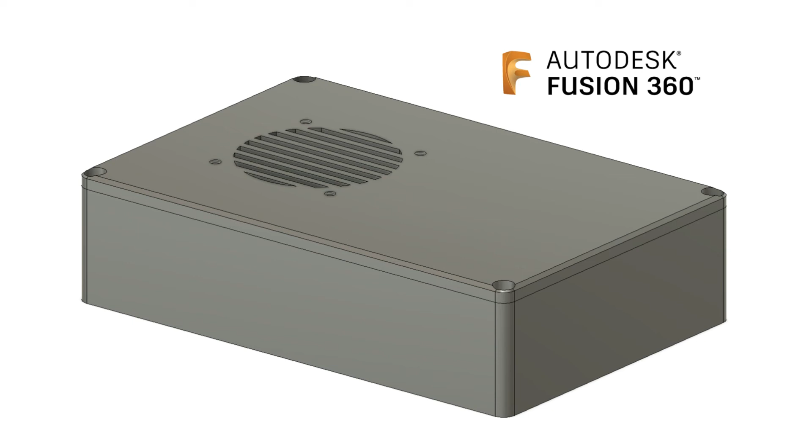Alright, let's get started with the design. So we're going to start with a new component, and before you start any design, just save the actual file, so that you have it. So we will name this to the base,

and we will take the top, and then we want a rectangle. Let's go, say, 80 millimeters long by 35 millimeters wide. That seems like a good number to start with. I can double check that number with an existing Raspberry Pi real quick here, just to get an idea. So we're going to want to go a little wider.

Just measured it. We're looking at, let's say, 70 wide by, well, the Pi itself is basically 90 millimeters, but to get usable length, we're going to say, let's go 110 millimeters on the length. So 110. And then that's going to be the outside, the inside diameter.

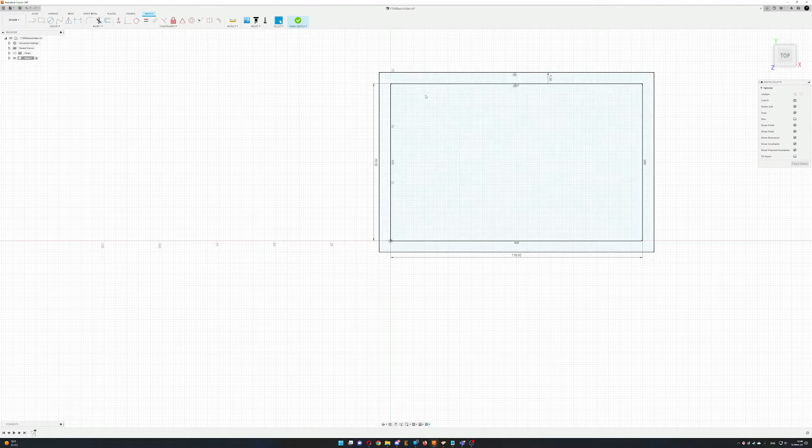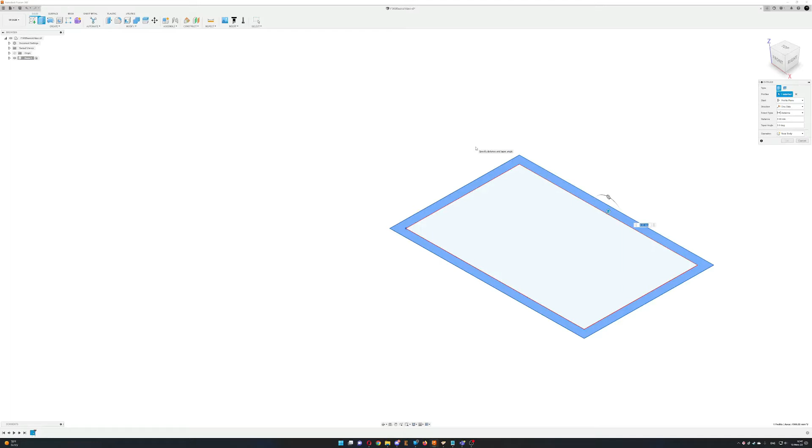So now we're going to hit E for extrude. We're going to select the outside wall, and for this case it needs to be, let's say, 25-ish millimeters. Let's say 30 millimeters tall. Just so we have some air clearance and some room for pins.

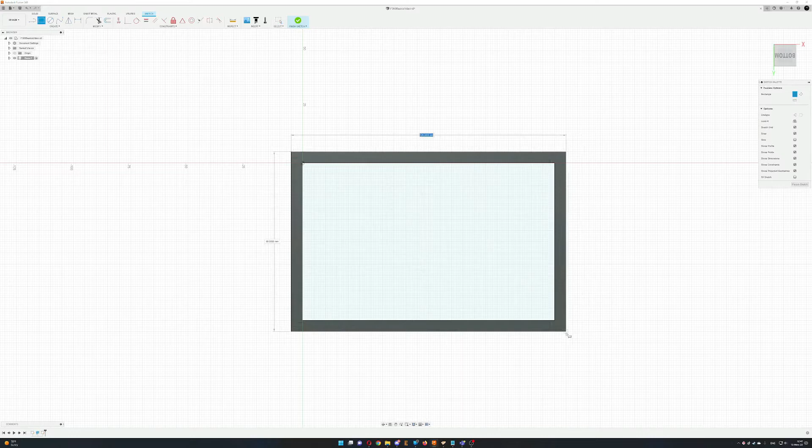Alright, so now that we have the walls done, we're going to go underneath, and we're going to click on Create Sketch. We're going to click on the bottom, move it to the center, just click a corner here, click that, click Finish, and Extrude. Select both of those, and we're going to go down, let's say, 2 millimeters. And since those join, now we have a nice beautiful box here.

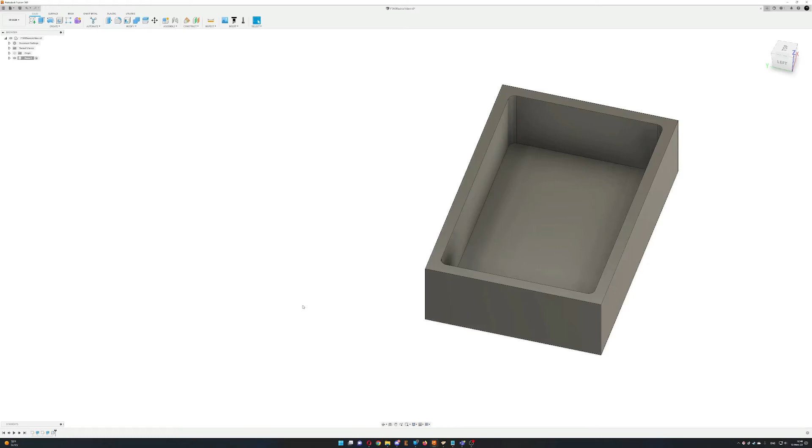But since we know that this is going to get machined, we need to put some fillets in here so that it's planned for. So what a fillet is, it takes the two corners and it rounds them. And we're going to use a 6 millimeter end mill, so we'll make these 3 millimeter. That way it's nice and clean. And we will also do that to the outside, just for aesthetics at this point, really. And then click that and that, and 3 millimeters there, just so we have a nice aesthetic looking box.

Alright, so the next step is orientating it, deciding which way you want it. So we need to add holes. Well, actually, it depends. We can build the studs into this design, like I've done for Young's project for the motor scooter, or I can build with just holes for standoffs. And I think for our case here, I'm just gonna do standoff holes.

So what we do is we make a new sketch, click the inside there, and then we're going to go find a point, and click 4 points, because there's 4 holes. And then we need to start doing some referencing. Whoops, not D, not R. So we're gonna go off of that wall. Based on the measurements of my Pi here, I know I need at least 4 millimeters on this wall. So we will go 4.5 millimeters for a little bit of clearance.

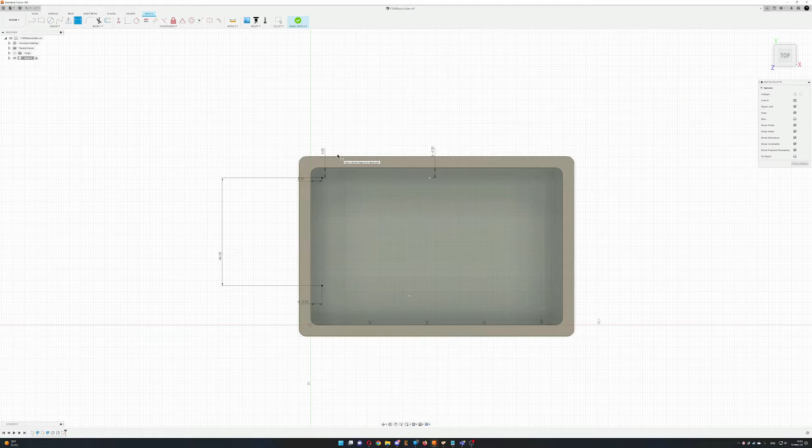And that's a good way to do it if you have a lot of the same dimensioned part. There's also other methods you can use where you can set up dimensioning that's a little more advanced, where you just type in a name and it knows the dimensioning based on that. Alright, and then for this part here, that's also going to be referenced off of that one. Also, if I need to adjust the referencing any, I have a quick way of doing so if I need to change it.

And since we need to measure that screw length, which is, let's see here, that appears to be 58 millimeters. So we just take this, go to there, make sure you don't have any weird angles going on. 58. And then this one will reference this, but again, make sure it's not perpendicular to this. You got to make sure it's vertical. And that's also 49. And this distance is the same as this distance, since it's a rectangle. And now we have our 4 holes.

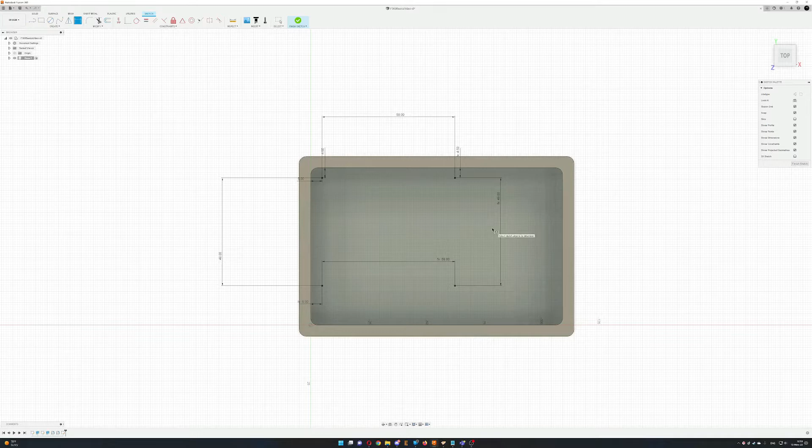Now you click Finish Sketch. Think a minute. Right now, Fusion is under maintenance. I'm doing it in offline mode, so sometimes it hiccups.

So now we're going to select these 4 points, and where it's red, it's where it cuts. But we're going to go over here. We're going to click Tapped, and we are going to use an M2.5, I believe, for the standoff we want. So we want to click 2.5 millimeter. We'll select the, let's see here, 0.45 pitch. There's also 0.35 pitch, but now we need to select our depth. We only have 2 millimeters to play with, so 2.

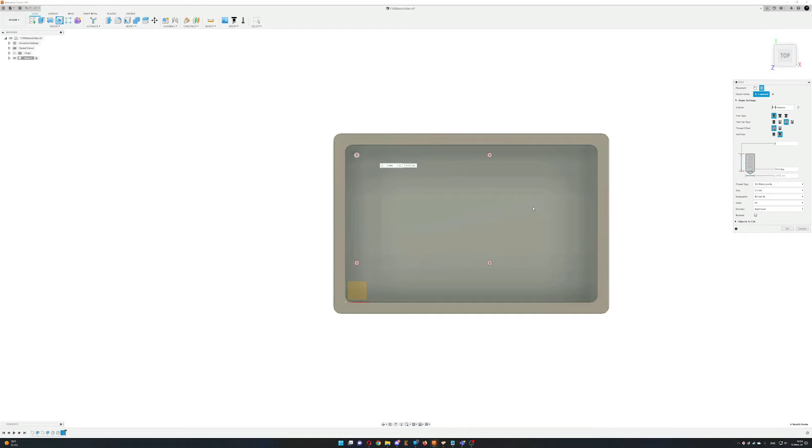And another thing, if you're going to make this for 3D printing, right now you have a visual tab. It'll look like that. So if I click Finish, it's still a hole, so you still get the minor diameter, so that you know what hole to drill. However, if you're going to 3D print this part, you can click on Modeled, and now it actually has modeled threads in there.

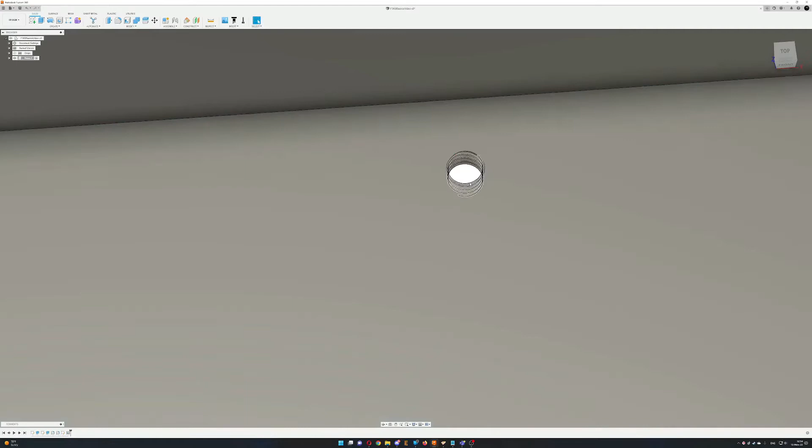So what you would do is you would 3D print it, and you could actually just screw your fastener right into that part right there with no tapping needed. But we don't want to do that because it makes actual manufacturing a pain. And to be honest, if you're 3D printing, you can still just run a tap through it. So we click that, get rid of that. So now we have our 4 holes there.

And now we're going to go to McMaster-Carr here and find some standoffs. So we click Insert, and it looks like because it's offline right now, McMaster-Carr's not showing up, which is a bummer. Let's see if I can. Let's see. Yeah, it looks like. So we won't worry about that for now.

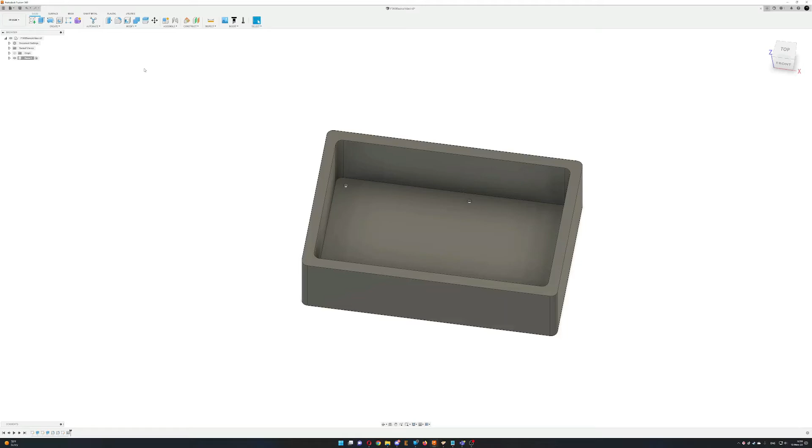Alright, so the next part we need to make is the lid. So what we will do is now we'll make a new component. So what you do is you click the little toggle button here. So now you're in the full structure. And now you click Create New Component. And you're going to click the top of that. And now we're going to type in lid as a name. Click OK.

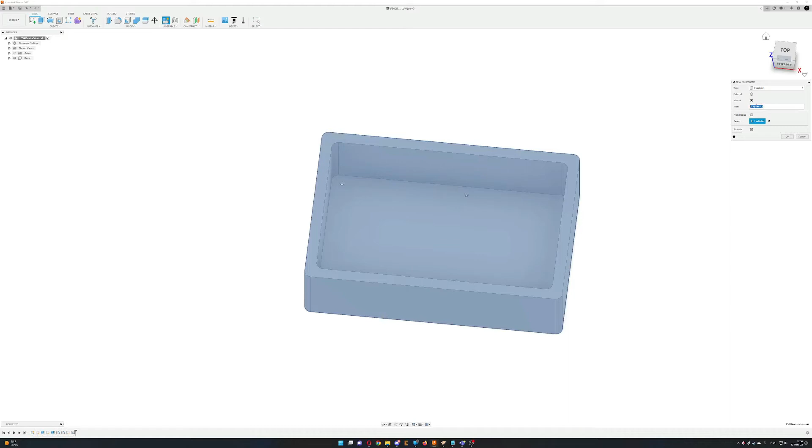And now you have a lid, except it went over there for some reason, so we will do that. So what we gotta do now is just move that up here. Alright, we'll just redo that one. For some reason it didn't. Alright. So we'll just make a new component, call it lid. There we go. Now it's properly associated.

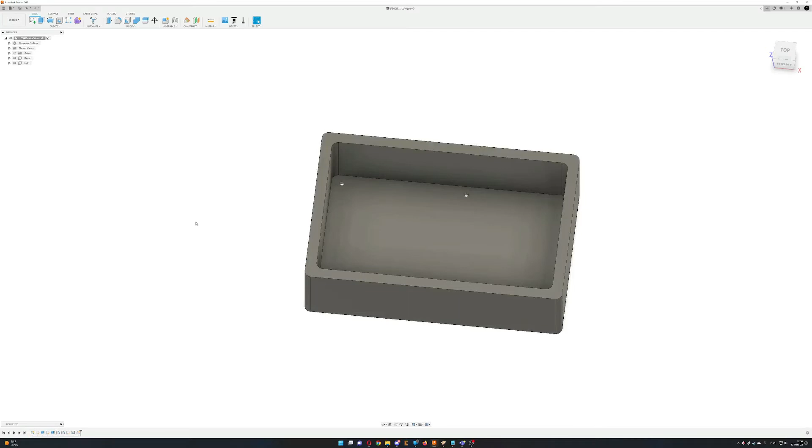And you'll notice that this part grayed out. So when you have multiple components in your assembly, when it's selected like this, where your radio button is on the main tree, everything's visible unless you isolate. So as soon as I click on lid, it becomes transparent. And we're going to use that.

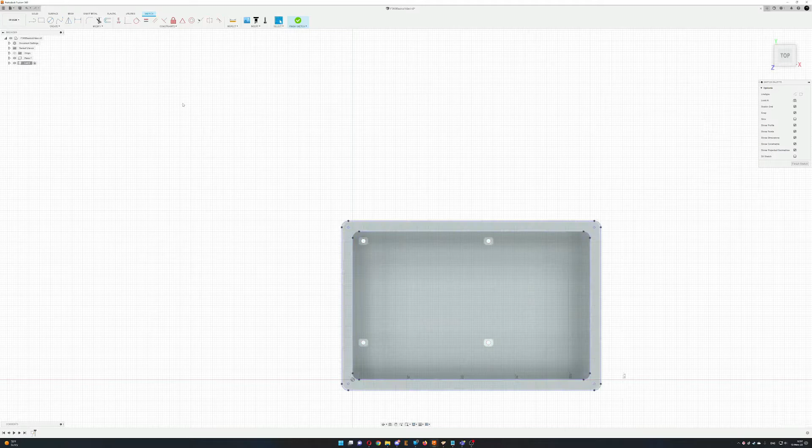So I'm going to create my sketch. I'm going to build it right on top of this, because what I'm going to do is I'm going to click the P button for project. And I'm going to project that entire upper surface and then click OK. Now I can hide that base, so I can focus on the lid.

So I know my outer size is going to be the same as that other part. However, the inner size I need to make slightly smaller for clearances. So this is where you need to have a design constraint concept where you need to understand clearances. And if you're 3D printing the part, you need more clearance generally than if it's a machined part.

But for this case, since I'm going to use screw fasteners to hold it together, it's not going to be an issue. So for this one, we're going to make it so that you could 3D print it. So I'm going to go with a 1mm gap here. So you have 1mm of play all around it, so that gives a little bit of looseness. And then we are going to extrude. And don't forget that little part there. And we're going to go 2mm. Okay.

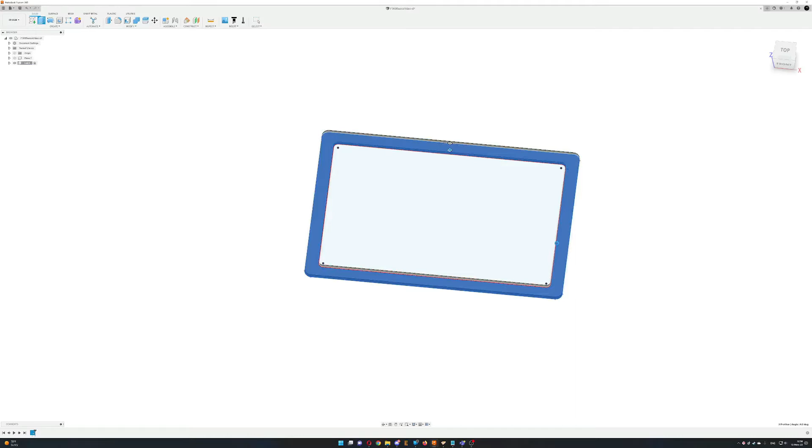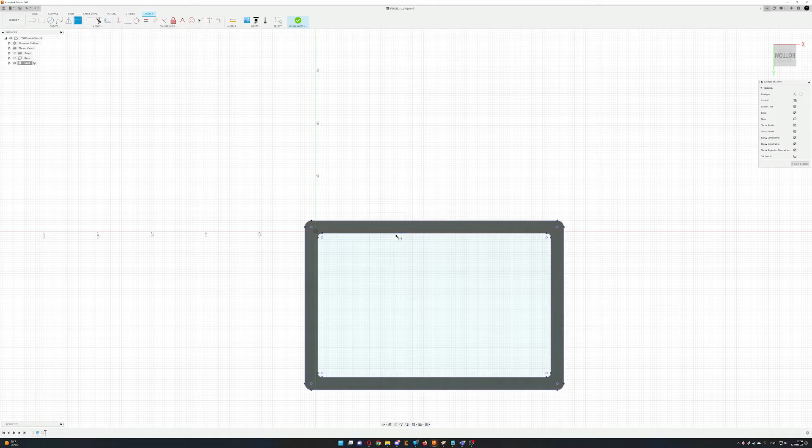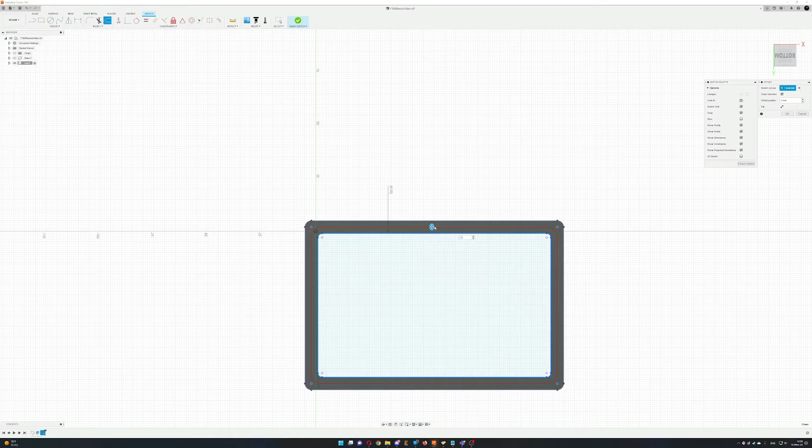Now what I want to do is I want to go to the bottom. I'm going to make another extrusion. So I want P for project. I'm just going to project that surface because it makes it easier. I'm going to do an offset of the inside now to half of that distance. So actually I need to find what that distance is now. We click that, we click that's fine, we're just using it as a reference. So now we're doing offset off of here, so we know that it needs to move 3mm. But since we are going the other direction, we gotta click a minus there. And there you go. Now you have a 3mm offset.

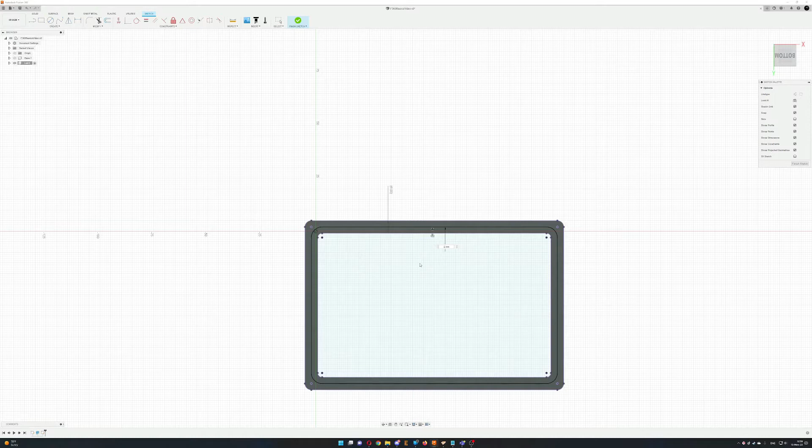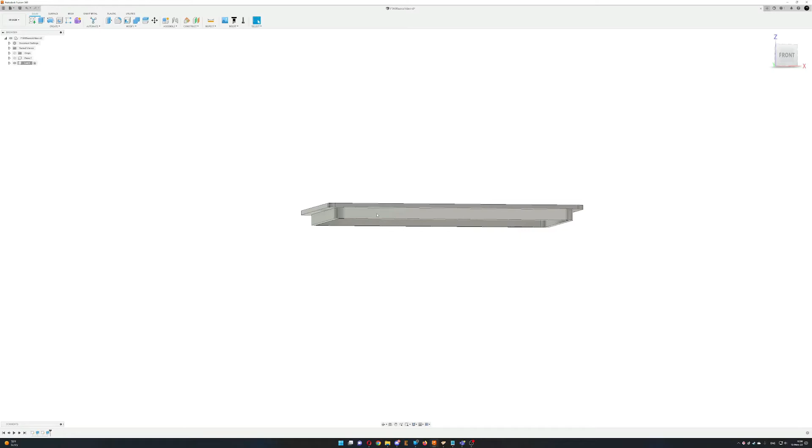So what we're gonna do on that is we're gonna remember our offset rules. So now I want to reduce that by 1mm for clearance. So I'm making that a 2mm hole. And then I'm going to click extrude and bring that down minus, actually no, we're going that way, so we don't have to do minus. So I want that to be probably 5 millimeters. That looks like it'd be nice. So that gives you a little lip so that you have some casing on your case, so it lines up and you have some good seal. And once we get done with this lid part, we'll be doing a similar feature on the interior of the case as well.

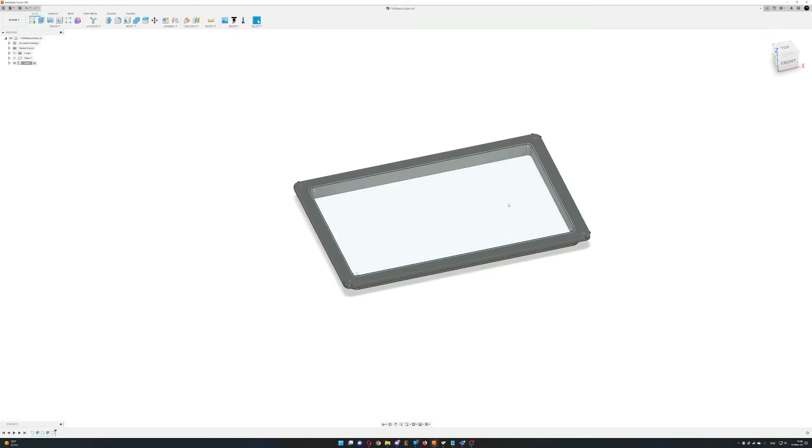So now that portion's done, now we can click the top here, and we're just going to click project again, and then we can click OK and then OK. I just did that so I had a place to click the surface. So we're going to go up 2 millimeters on that, and then because we're not animals, we're going to put some chamfers on this, just again style. And 1 millimeter looks pretty nice there, so we're going to stick with that. We're going to put a 1 millimeter on the bottom here as well for the same purpose, and that'll just help slide it into place.

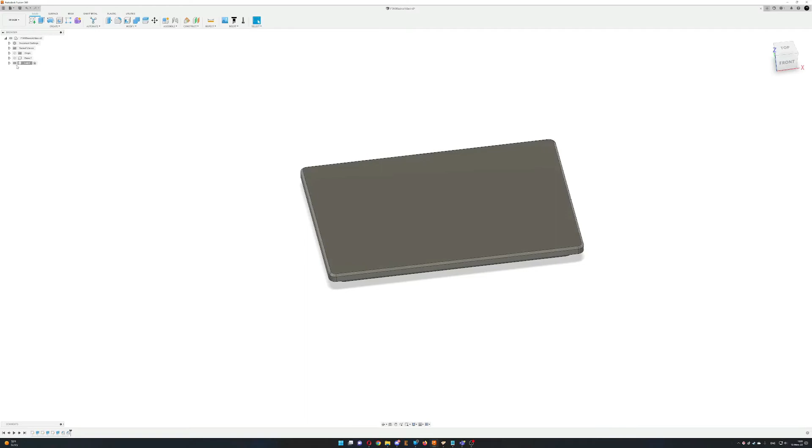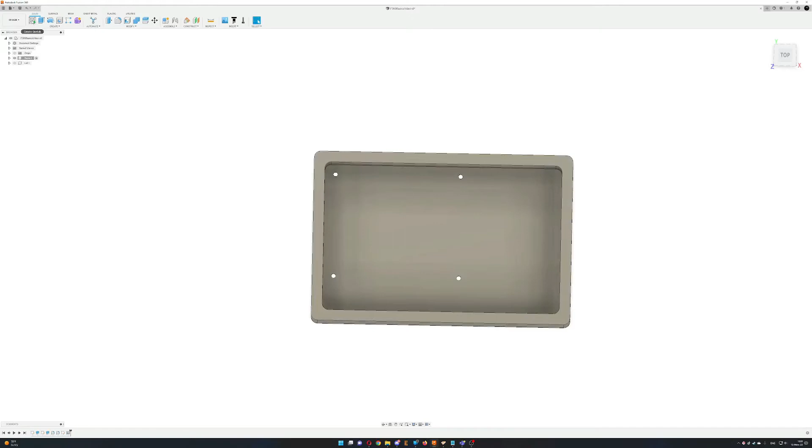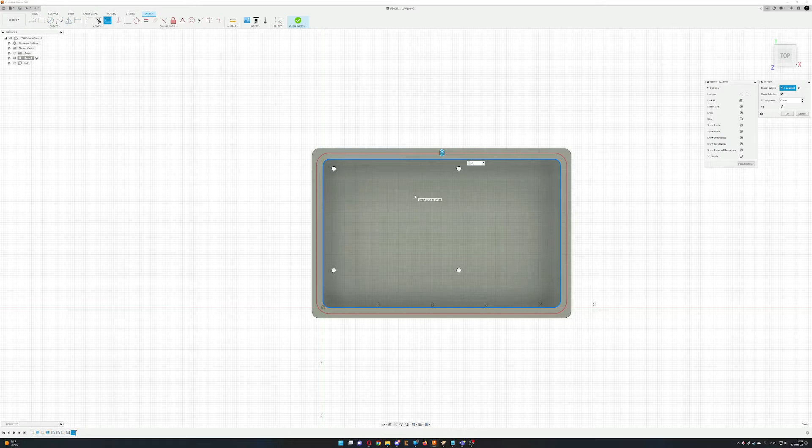And we'll come back to the lid later, but for now, you see the little recess on that, we want to turn that off. We want to turn this on. Make sure you click the little radio so that you're in that workspace, because down here you'll have a design tree that you can go through. And then we're going to click this create sketch, click up here, then we're going to click offset, click that, and we need to go -3 for that, and then extrude. And since we're going down, it's going to be -5.5. And see how operation switched from join or new to cut? That's what you want. You want it to cut. So now we have a nice little ridge there.

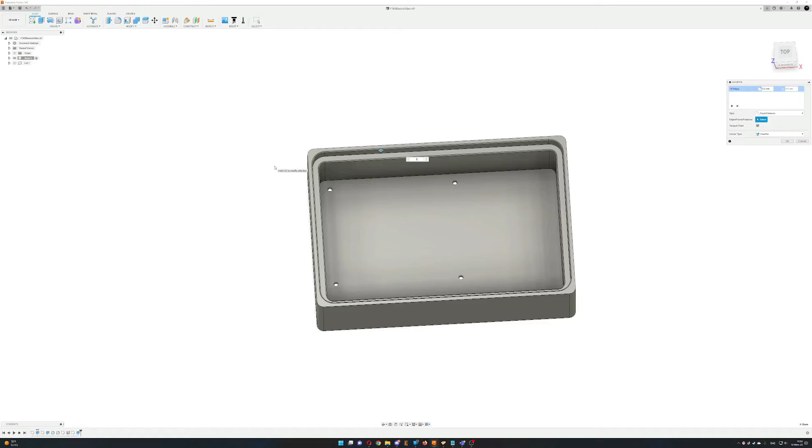And now we're going to put a chamfer on this inner edge. And this one. And 1 just seems to be a little too much for that, just because we're getting thinner walls now. So we will go with 0.5. And most likely this will be done by hand with a file anyway, so it's mostly there just to break your edges so that you don't have sharp edges that you're contending with. And there we go. And while we could fillet this base here, it'll be much more difficult to do with a ball end mill and having multiple tool changes.

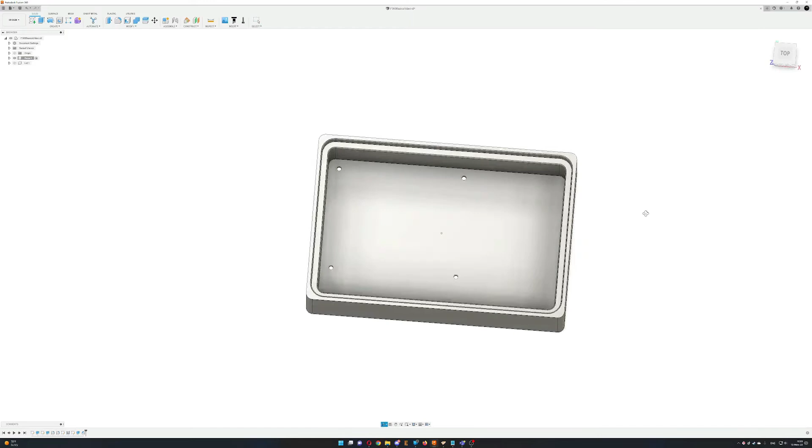So doing this, I can make this entire inside portion, including the outside contour, with only 3 tool changes. We'll get to that in a moment though, but keep that in mind when you're designing parts. You want to design the part in a way that it is easy to manufacture, as well as be functional and be aesthetic. So now we got the lid on. You can click here.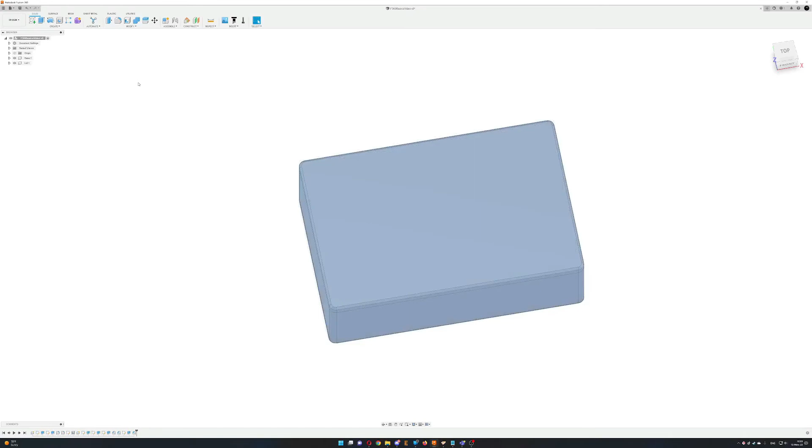That looks pretty sweet. And we can go to display settings. We can go shaded with hidden edges, so you can actually see the edges. Actually, you see every feature made in it. Or we can go to wireframe with hidden edges, and kind of the same thing without the shading.

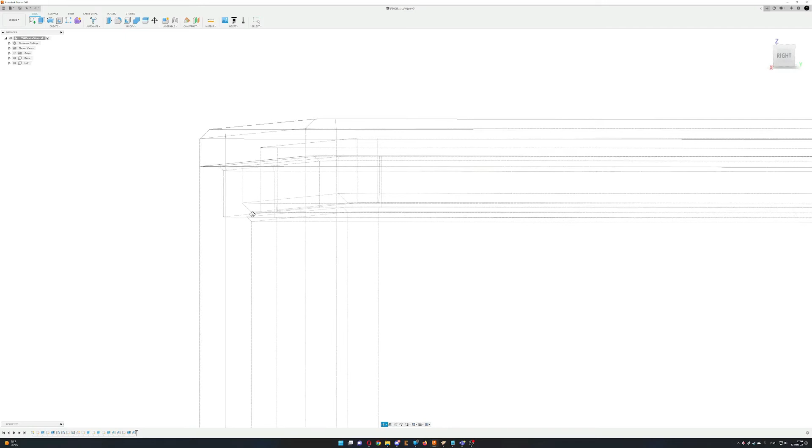So everything looks like it fits well. There's clearance, and that's what we want. And you'll see how those 2 surfaces don't touch. We want that. We don't want touching surfaces. That's just bad, because then things aren't working right.

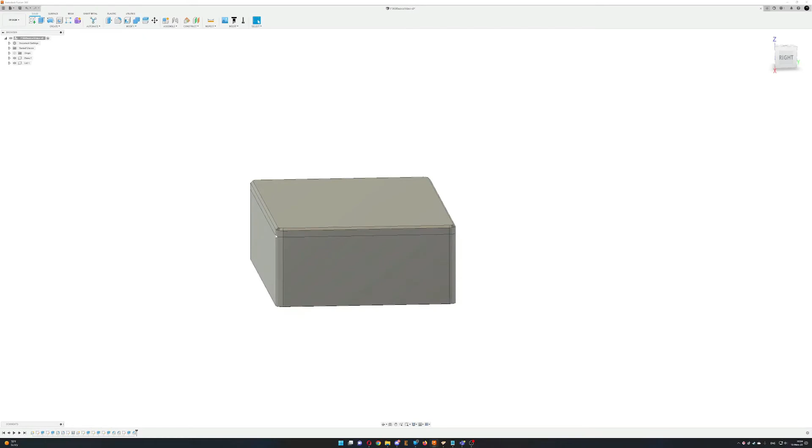Whoops, we don't want shaded. That just takes up way too much processing. We want shaded with visible edges only. So if you do it the other way, you don't see the edges, and we want the edges, or else you don't know what's going on.

Alright, so now we're going to do something a little different. We're going to rotate this, we're going to select the lid, we're going to click sketch, we're going to add our 4 points, but what we're going to do now is hit escape so we're not making any more points.

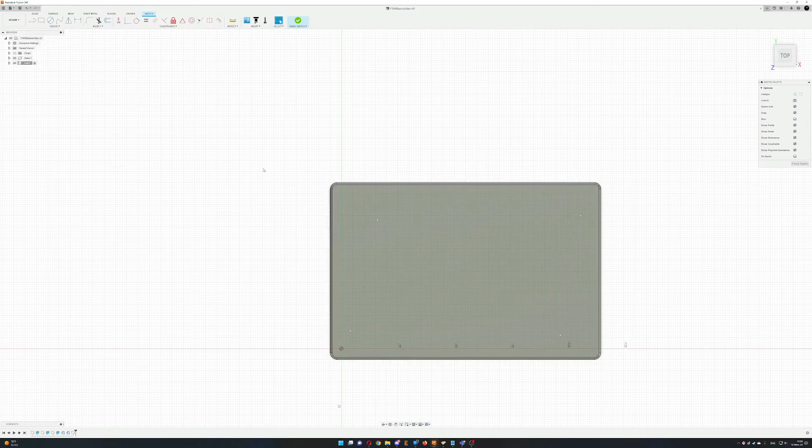We're going to click this little eyeball here, we're going to turn that off, and then we're going to hit P, we're going to project that, and we're going to project that, and then click OK, and then we're going to turn this little eyeball back on. So now you can see all of the underneath construction contours, because we need to add 4 screws to this.

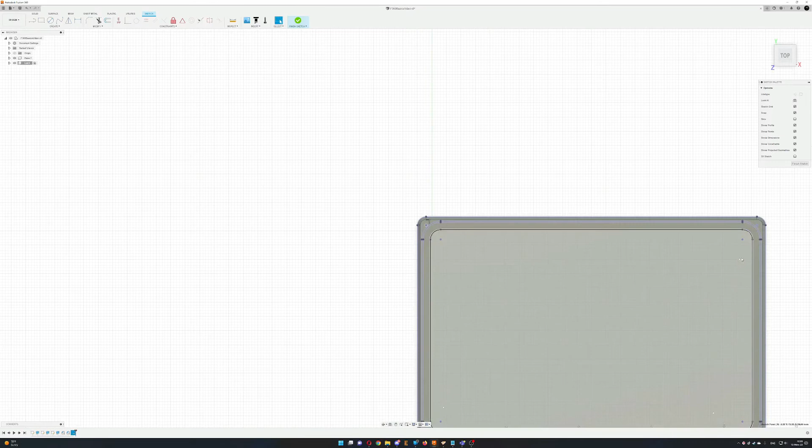So what we're going to do is, since this will be where we want the screws in the corner here, around that radius, we're just going to drag those to those points. And oops, scrolled too fast. Alright, good. Now we're going to click Finish Sketch.

And when the part that you're making is black, that means it's fully constrained. If it's blue, it's not constrained, and if it's purple, it's a projected feature, and if it's a dashed line, it's a construction feature, which doesn't get used for certain processes.

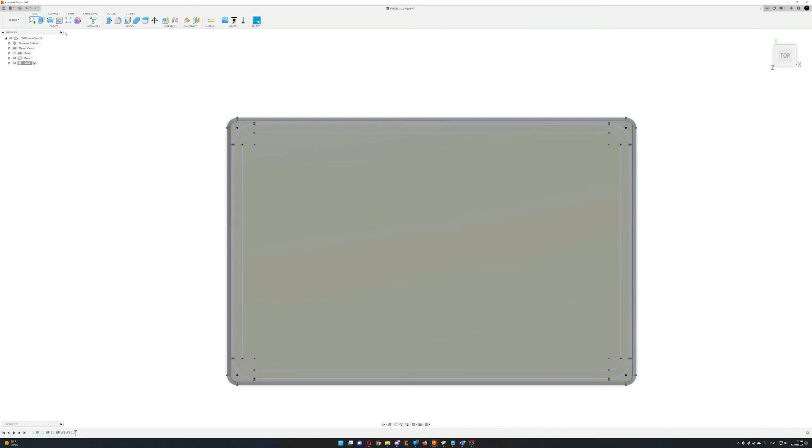So we've got both of these selected and visible, and that'll be important here, because what we're going to do is we're going to click hole like we did before. We're going to click that, this, and this. Whoops. There you go. And we're going to do this all in one step instead of having to make holes in both the lid and the base individually. This is going to be a counterbore hole, because aesthetic.

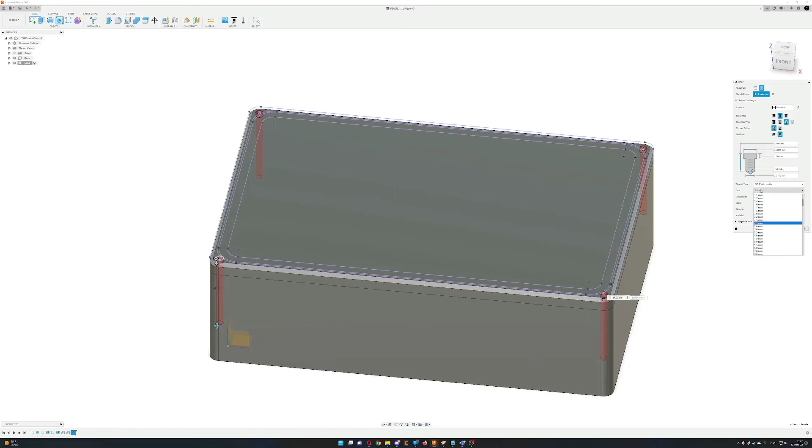We're going to make this a, let's do it how big. Nope, 4 millimeters too big. So we'll go 3 millimeter and see what we can get here. Let's see here. That's weird. Four millimeters should work. I'll figure this part out.

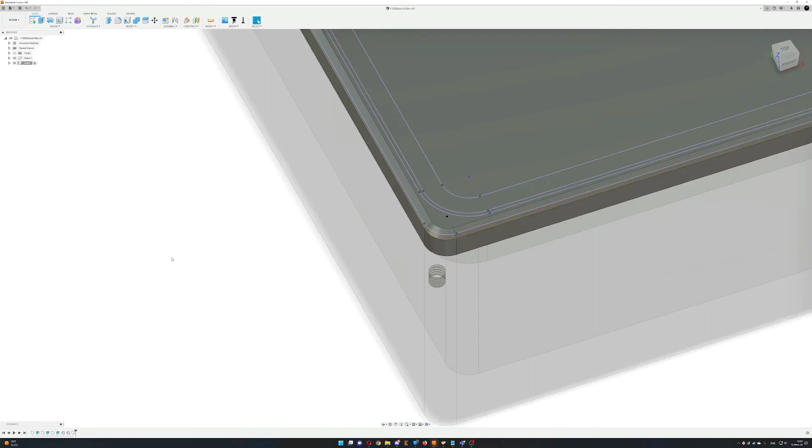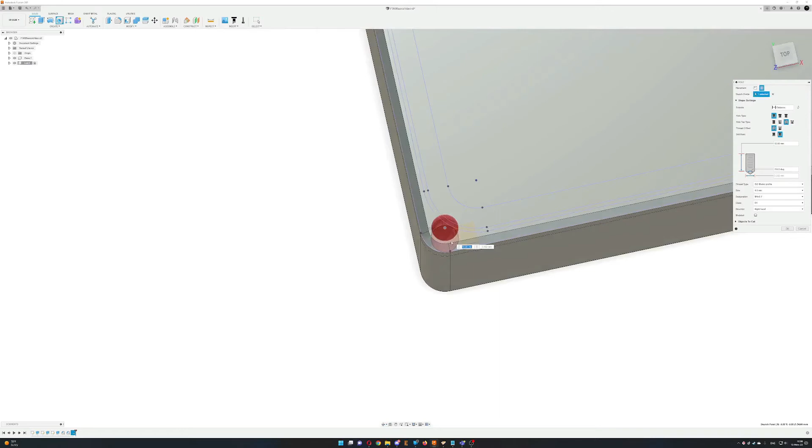Actually, let's just cancel that, and then we'll start it again. Sometimes it gets a little glitchy, and I don't know why. Yeah, see, now it's working. We want 4, and we know that it's gonna penetrate the ledge a little. That's not an issue, because you'll see what's gonna happen here.

It's a counterbore hole for M4. That size doesn't seem right though, but I know off of experience 6 millimeters is how wide that should be. So, and we want this to be, let's go 3 millimeters deep,

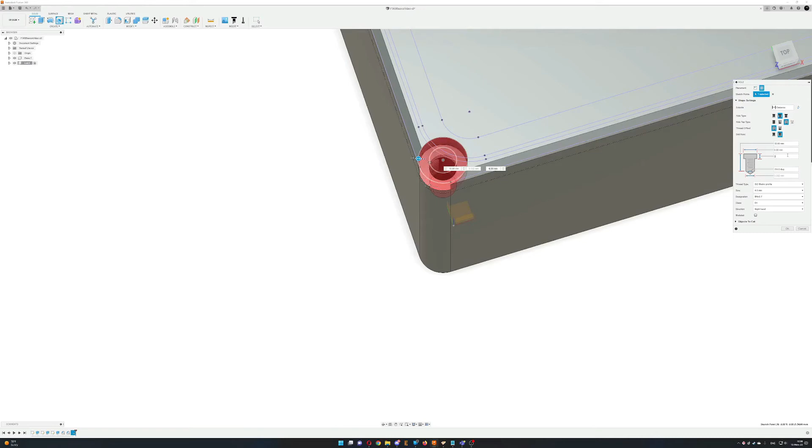and then our hole will go down, let's say, yeah, 10 millimeters would be fine, but we are going to have an offset thread, and the offset will be 5 millimeters. So what that means is that the thread doesn't start until 5 millimeters down, and then the total will still be 10.

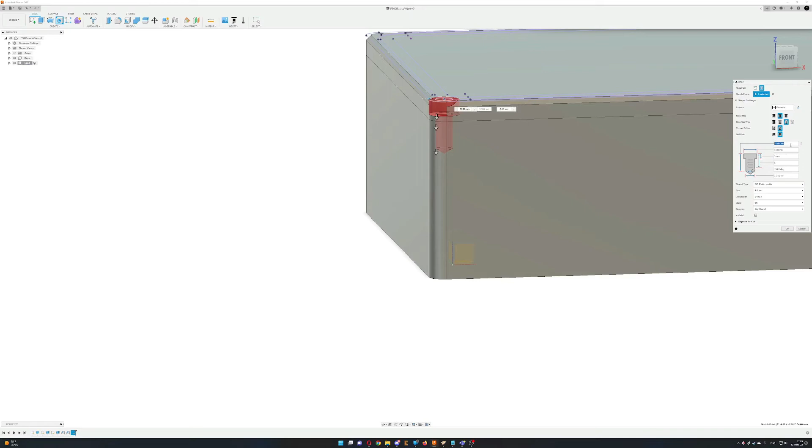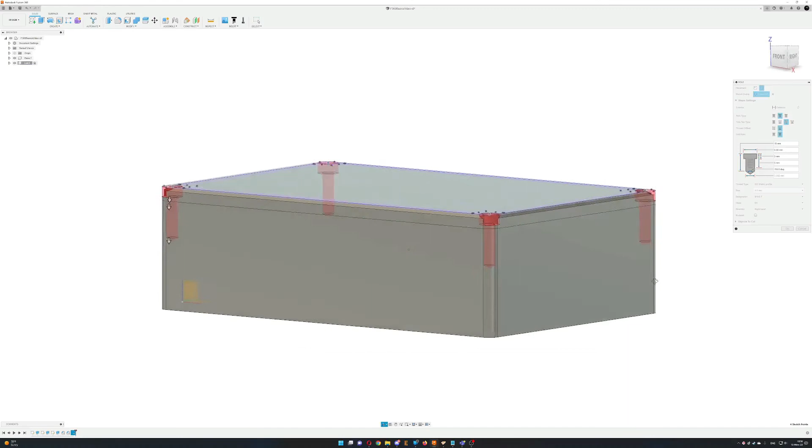So let's make that 15 millimeters thick, or down. And then we need to select the other 3 holes. And I know that it's going to rip out the corners here. That's okay. It's fine. If I wanted a slightly smaller screw, let's do that.

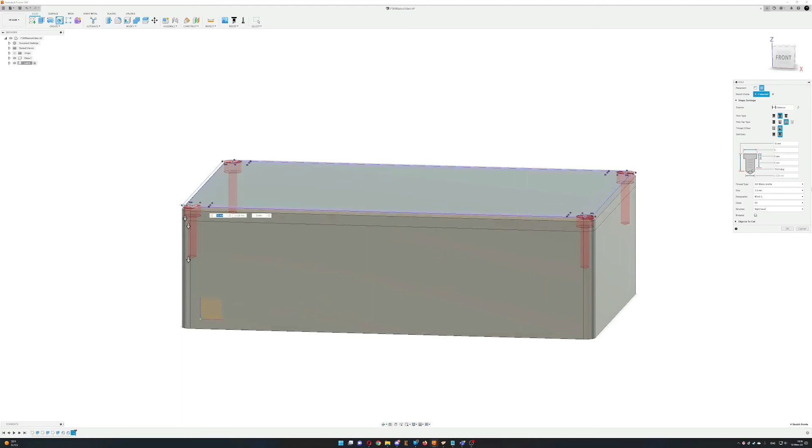Let's do 3 millimeter then. And that should be a 5 millimeter hole. And we can keep everything else the same. Click OK. And then we will select the main base.

So now you have a fastened plate. So on the lid, you'll see how it goes down here slightly. That's okay. What we'll do is, actually, there's something that isn't okay. I need to fix that.

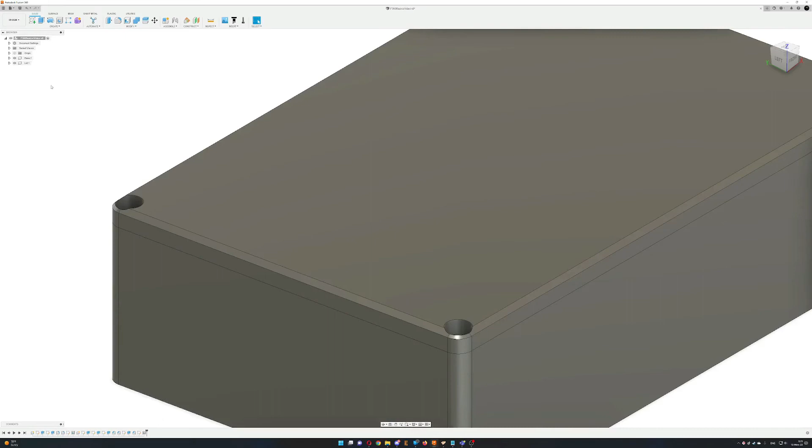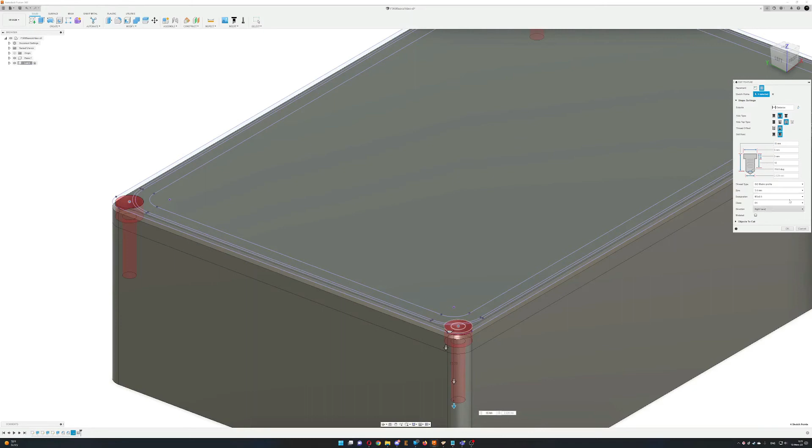Go back to the lid here. So sometimes you gotta play with things a little bit. I want the threading to be offset to 10 millimeters, not 5. And then we got 15 total. There we go. Now you see that you got threads down there.

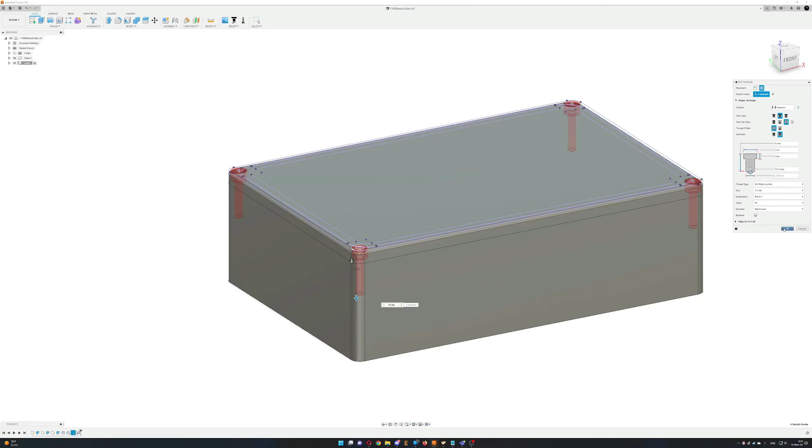So another way you can do is just ignore the offset and just click full and do the offset yourself, which is what I will do, because on the lid itself you're not going to have any threads. So what you'll do is you'll just drill this up for a clearance hole. So at 3 millimeters you'll just drill a 3 millimeter hole instead. But to be honest, when you do the counter bore operation, that also creates a clearance hole, so it'll make it for you. So that part's not an issue.

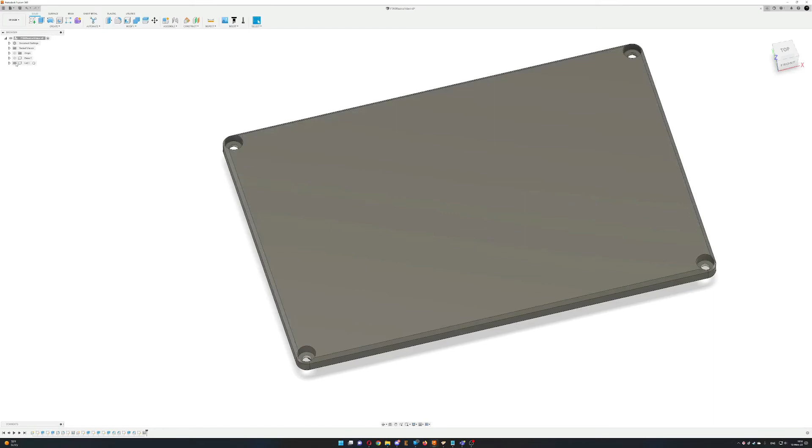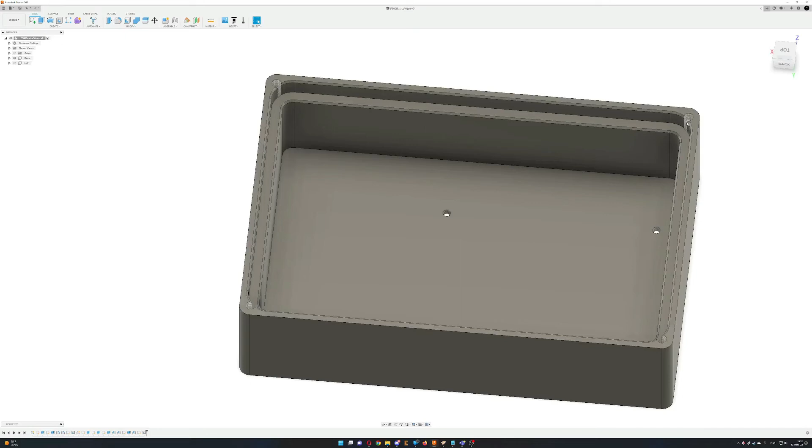And then you've got your fully tapped holes. What you will do though is, in the order of operations, you will drill these 4 holes first. Actually, you'll drill those ones too. Then before you do any other machining steps, you will actually tap all these holes so you don't have that non-continuous portion here not being tapped. And then when you do your machine operations, it'll cut it and it won't care.

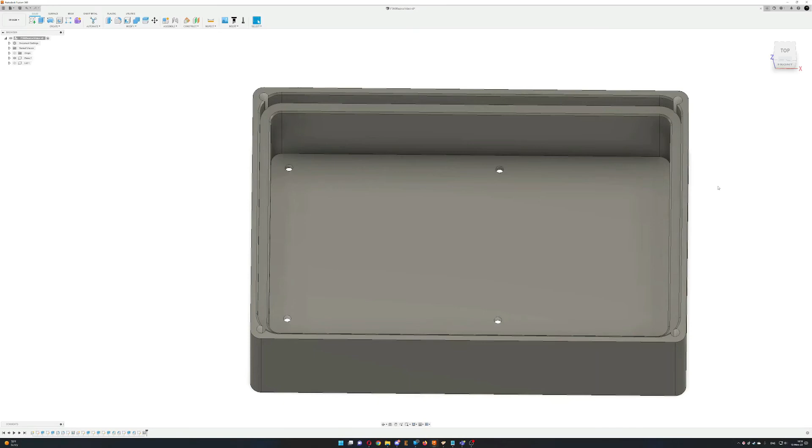If you tap after the fact, you have to have a very sturdy, very rigid tap holder, and if you don't, it will go crooked and you can break your tap off, and you don't want that because then you scrap the part. So that's the basic part. That's how you'd make a simple Raspberry Pi case and lid.

What we will add now is, on the lid side of things, you need some vent holes. So what we will do is, I'm going to pretend we're going to put a 40 millimeter fan on here. So we will take the lid here. I want a circle. Let's see here, I got a 40 millimeter fan here. I'll just measure one of these so I can save the time. That circle needs to be 37 millimeters.

And then we will hit escape, hit the X button for a construction line. Where you see where that triangle is there, we click there because that's the center line. And then 180 degrees to the other center line. And now you can click X again. So this is a center line construction line. What we can do now is just drop that right on there, and now it's just gonna ride the center line.

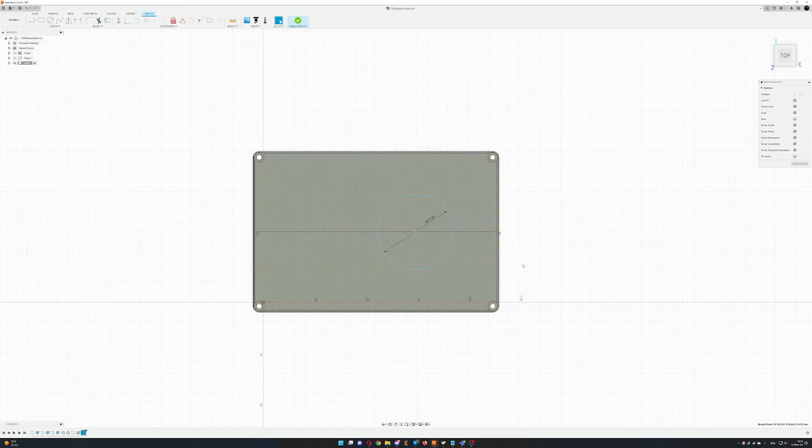So our case faces this direction, so this side's gonna have your IO on it. So that means we want to make the fan hole over this way so that it's over the actual processor portion. So let's make that, say, 25 millimeters. That doesn't look like enough space, so we'll say 35 millimeters. There we go. That'll stick the fan right over the processor, the RAM, and all that other good stuff. But we're not done yet.

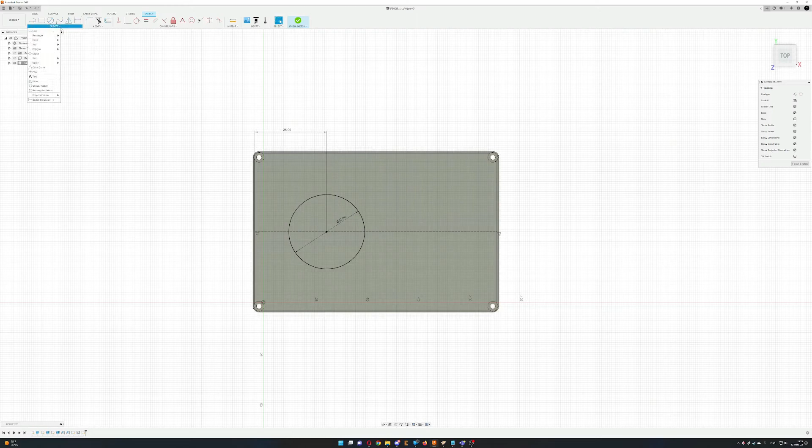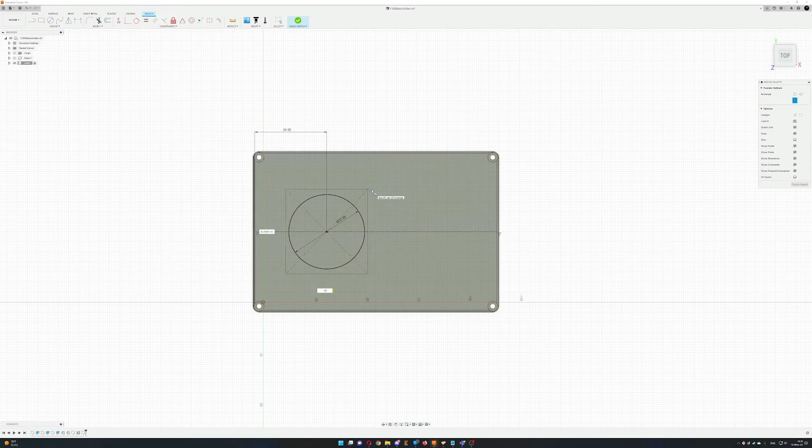Now we need to hit escape, go up to create, click on rectangle and center rectangle, and now we want to look at some spacing. So since it's a 40 millimeter fan, it obviously has 40 millimeter sides. So that's 40 by 40. And I do that just for layout purposes. So what I'm going to do is I'm going to select these four long edges. So now they're blue, they're selected. I'm going to hit X and deselect them, and now they're dashed lines, so they are construction lines.

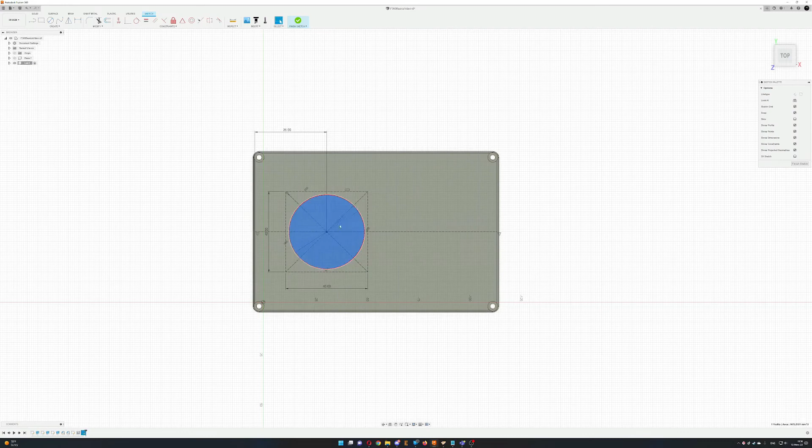They're unlike this black circle here. That circle is an actual dimensioned line that will be used for machining. So you can select that circle. You can't select that box. And that's what we want, because now we need to put the screw holes for the, what's the word, for the fan in here. And I know these fans, because I have one in my hand and I have a pair of calipers, are a 3 millimeter hole. So I need to put a 3 millimeter screw in them.

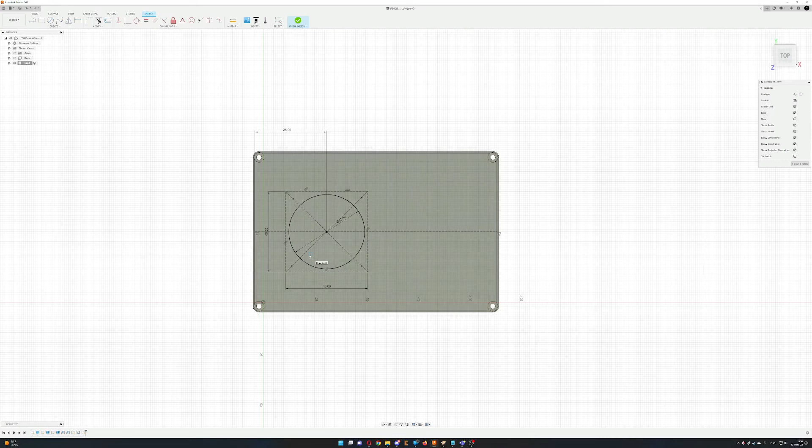So I need to find my point tool, and they're going to be on these diagonals, and then we just need to measure, and I believe it is 37 between centers.

32 between centers. So what we will do is take my dimensioning tool and click there and there and make that 32. Make that 32. Make this 32. And then that 32 - oops, not 232, just 32. And now they're all perfectly squared up on that line. That's good.

So we are going to add some lines. Since I've got this center line here, we're going to start with that one. Now you see how that little section there turned black? Because that's now an actual line.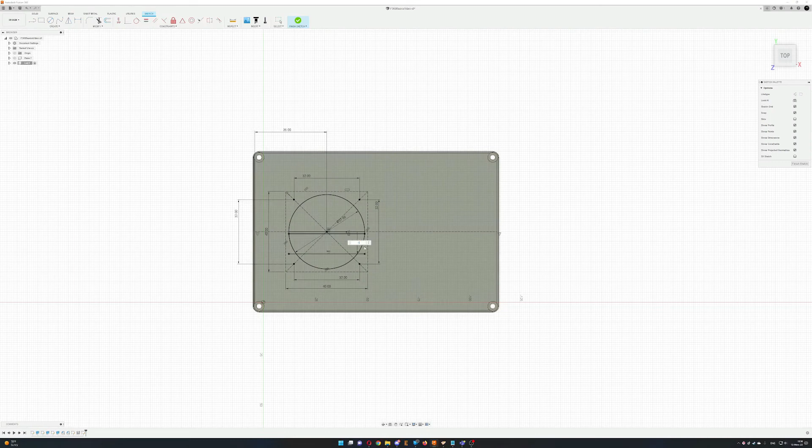So then we're going to use the offset tool. Not that one, I don't want that one. So what you do is a long click, and you can select that or the other line. I want to make that one offset, one line there, and we're going to do the same for the other way. And that one will be -1. Whoops, that's not what I wanted at all - I said -1. There we go. So now I have a 2 millimeter slot here.

So now what I'll do is use the pattern tool, rectangular pattern. We're selecting that object and that object, and we're going to go both directions, so symmetric. I want, let's say 5 - but nope, that's not going to be enough, so 7. Maybe that's going to be enough, we'll find out. And then, let's see here, distance - let's try 16. Sixteen's too much, let's do 9. There we go, that's what I want.

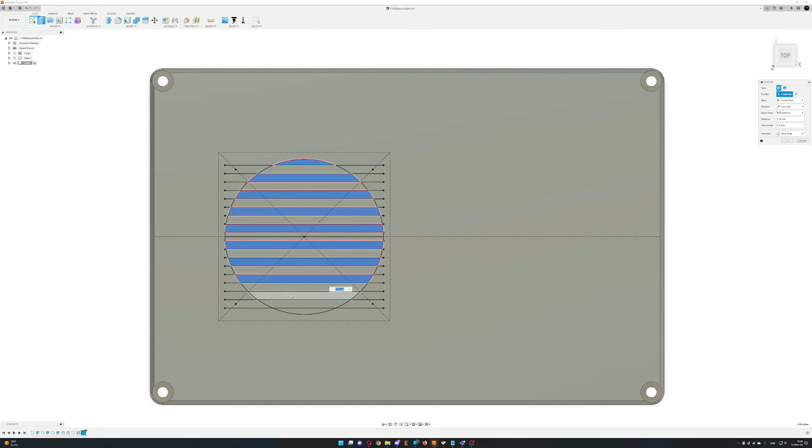Alright, so now I have this series of lines. So what I'm going to do now is click extrude, and working from my center - so that one stays, that one goes, that goes, that goes, that goes, that goes. And then we just do that. Click the bottom. Now we have a grid.

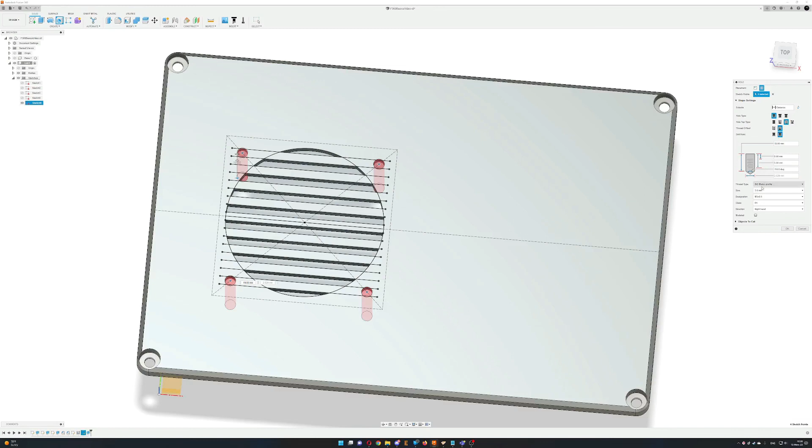But you notice my sketch disappeared. So what we can do is open up the sketches, turn the eyeball back on, and now we can click on hole, click on our 4 holes we made there before, and these will be just simple tapped holes, 3mm. I've got that set already. That looks good.

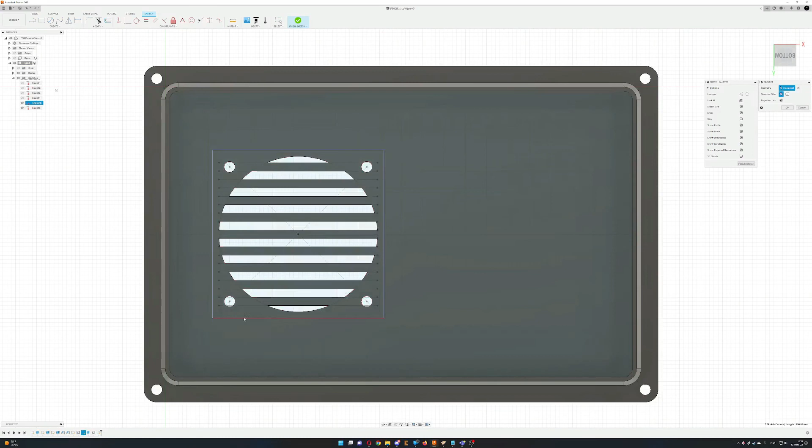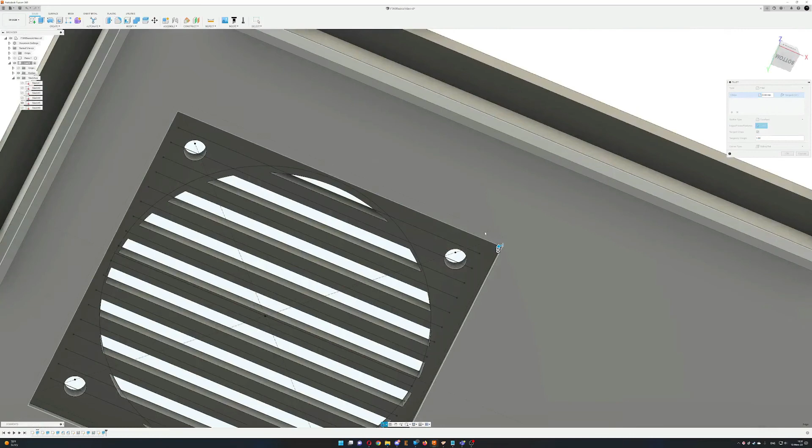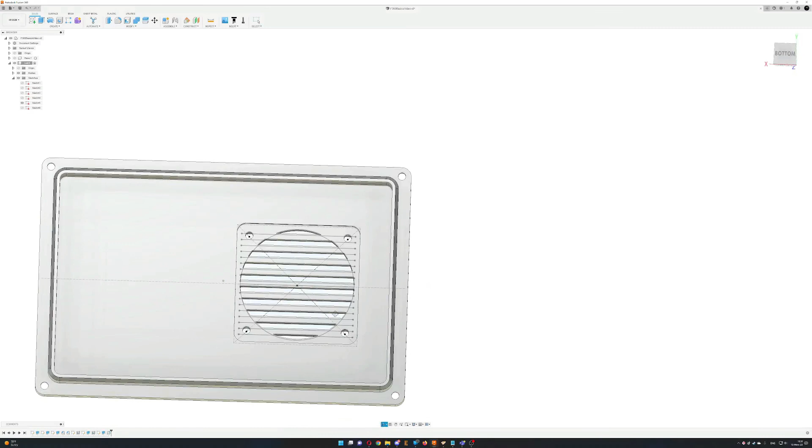And now we're going to come in on the bottom side. I'm going to click this because I'm going to do something a little different here - I'm going to project this square, and then click OK. I'm going to select that, and extrude it another millimeter. And then we need to go in here and make a fillet, so F for fillet, and then 3, and click OK. What we just did is made a small recess so that the fan can fit positively in it.

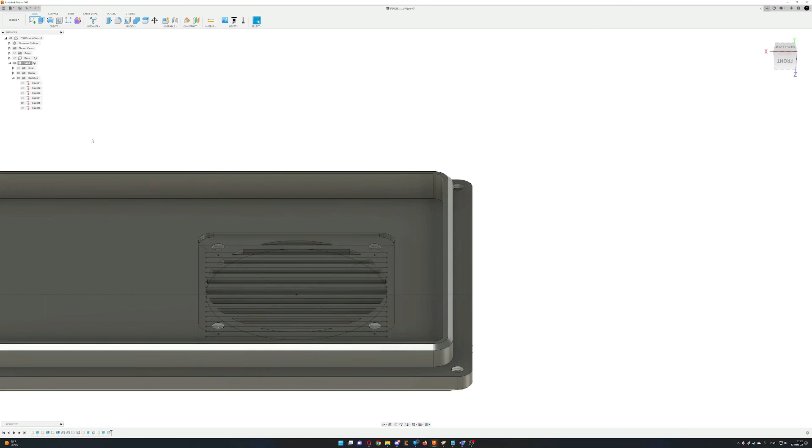That said, I should probably - let's see here, that's 40 across. These fans in reality aren't a true 40, they're slightly under, but for sake of tolerances, to keep consistent, we're going to add a millimeter of space around that. So what we'll do is go back to the sketch - don't need that one anymore - edit the sketch, and we'll simply hit offset. Click that, click that, that and this. Go -1. Finish sketch.

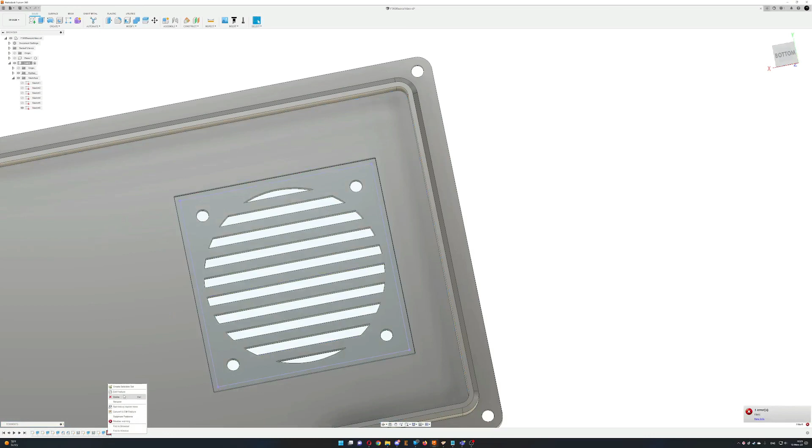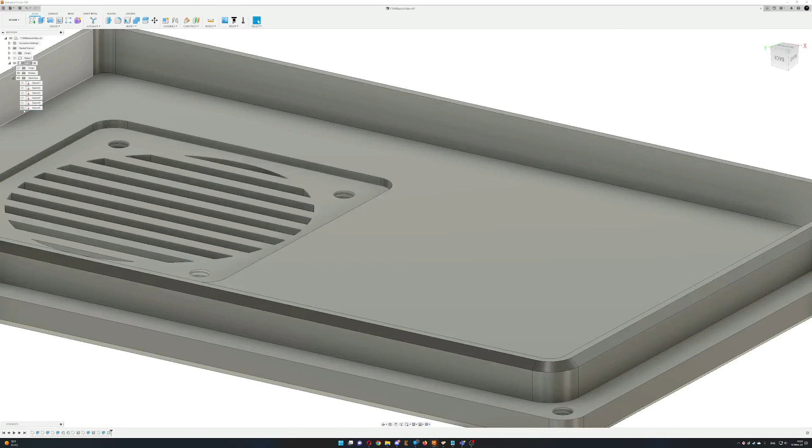And then we need to re-extrude it, because we need to deselect that part. And then we've got to fix our fillets, which will be just selecting these again. I'm going to make that 3. We can turn that sketch off now. And there you go, there's a nice lid.

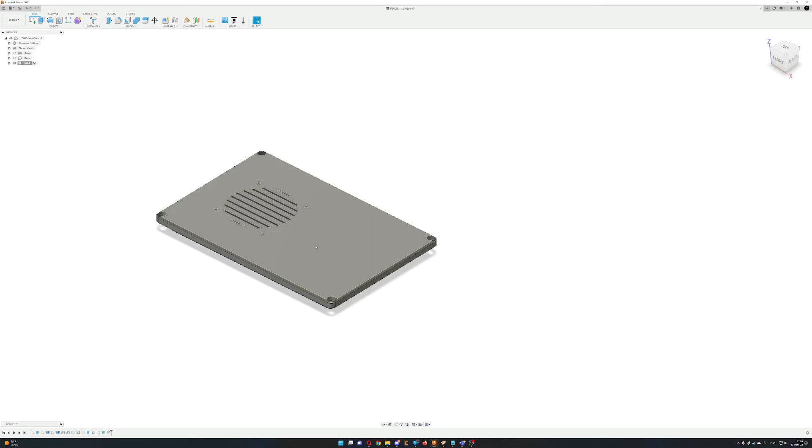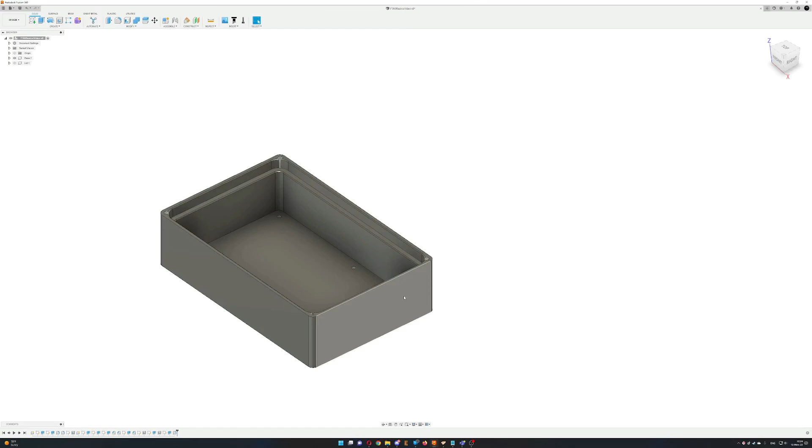What I would generally do for a Raspberry Pi in a box like this is make a custom PC board for the header. That way I can provide power to it, and also build out a small connector so you can hook up the... let's see, where's the base? Since this is the side with all the connectors, I'd build a little bridge so that the connector can actually go out the side here on a bulkhead fitting, for the Ethernet port and for the 4 USB ports. And then for power, I would add a barrel connector that just feeds 5 volts from outside, and it'll feed into the header pins of the actual Raspberry Pi.